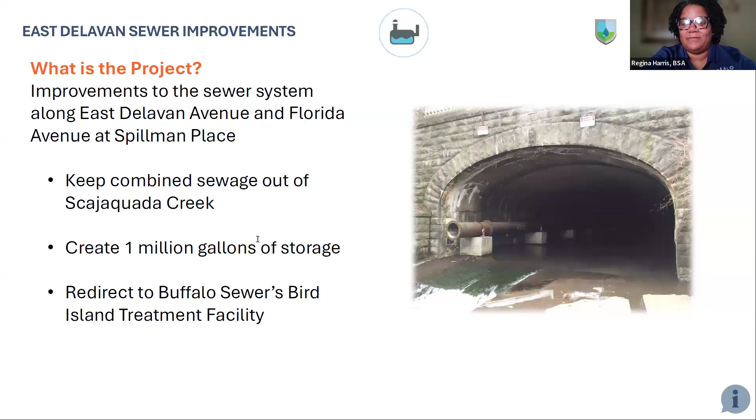All right. So why is this project required? The Buffalo Sewer Authority, like many communities throughout the United States, has a long-term control plan, or in our case, we are under an administrative order, which required a long-term control plan, which we continue to work on, and our Queen City Clean Waters is a part of that. But it's for compliance with the United States Environmental Protection Agency, or the EPA, and the New York State DEC, or Department of Environmental Conservation.

As part of that, we are required to reduce the number of combined sewer overflows, which in essence helps to improve water quality. And also our projects will help to increase the resiliency of the system overall.

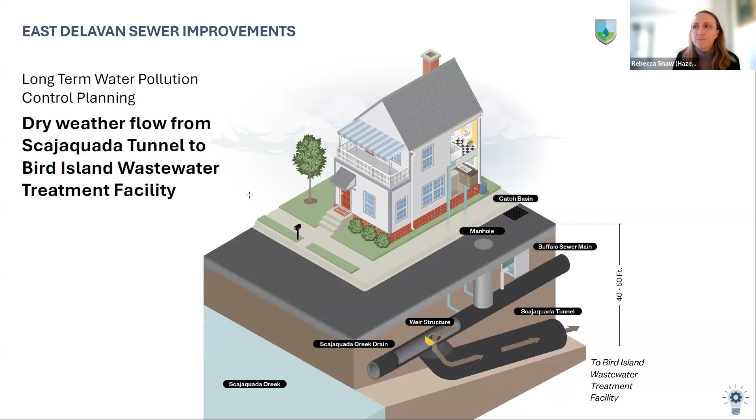One back, please. So during wet weather, if it's raining and there's heavy snow melt, a portion of that combined rainwater and sewage enters the Scajaquada Creek drain, and a portion of it does go out an outfall pipe into the Scajaquada Creek. So this project, as Regina was mentioning, really aims at reducing those overflows by temporarily storing over 1 million gallons of combined sewage and rainfall and snowmelt. This is really intended to hold the combined sewage before it can be sent to Bird Island for treatment. Next slide, please.

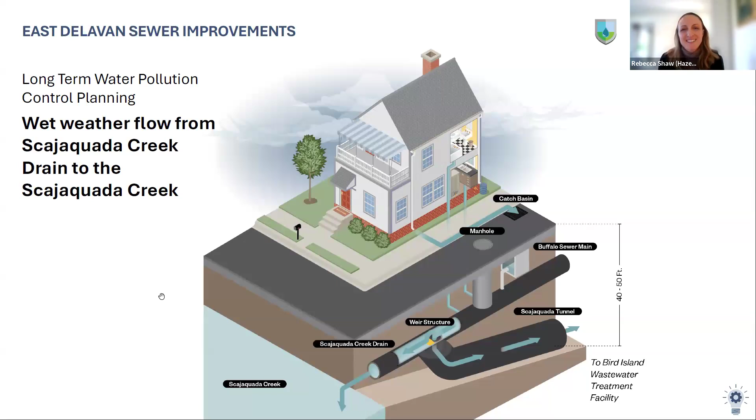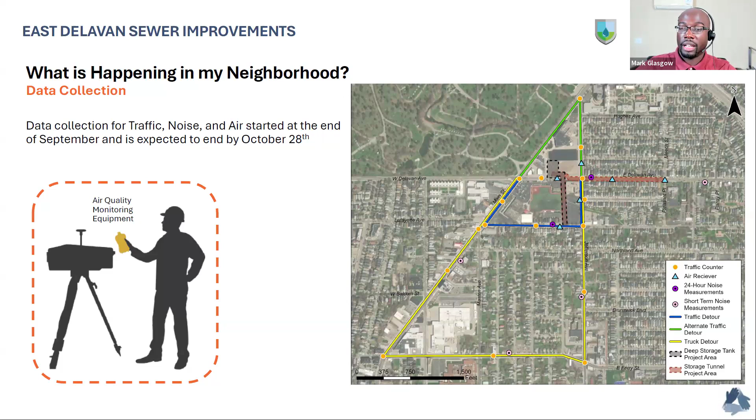And the data that's going to be gathered will, of course, be included and available in the environmental impact statement for public review and comment at a later time. And to just go into a little bit about our enhanced public participation plan. So certainly the Buffalo Sewer does value public engagement and insight. And our team has really spent the last few months really actively engaging with the public through district breakfasts, meetings with elected officials and speaking at block parties, as well as tabling at neighborhood events throughout Buffalo, such as Funk Fest and Friday Night Live over the summer.

Throughout our different engagements, our team at Clementine Gold Group, we've been having various conversations with the public based on our project's enhanced public participation plan, or what we like to call the EPPP. And the enhanced public participation plan has been approved by New York State, and this plan more or less aims to make sure that we're promoting equity and addressing environmental justice concerns through community engagement throughout the project.

And with each of our public engagement events, we are also seeking to solicit the public's feedback through surveys where they can weigh in on the design options, which Rebecca was reviewing briefly prior to me, and to also help the community understand what are the potentials for community betterment projects, and making sure that they are aware of what those initiatives are that could help better the community, including revitalized trees and the landscaping, and also new water and sewer infrastructure, and certainly the potential for workforce development opportunities.

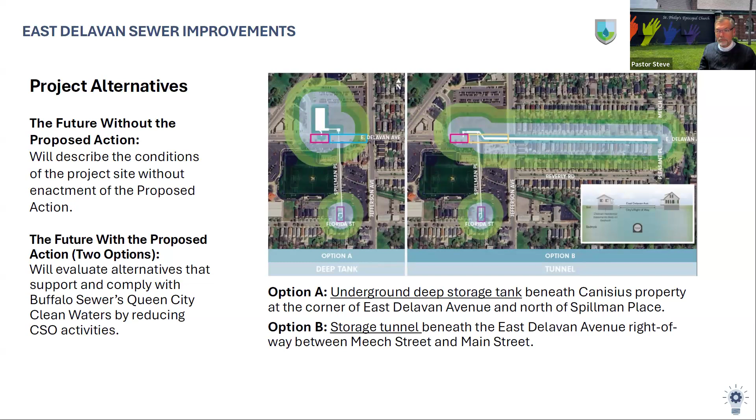Mark, I think I'll just take this time to say all of the comments that were received today, we will formally respond to as part of the final scope of work for the DEIS. And you can continue to make comments through November 1st, and they'll be accepted and responded to in the coming months.